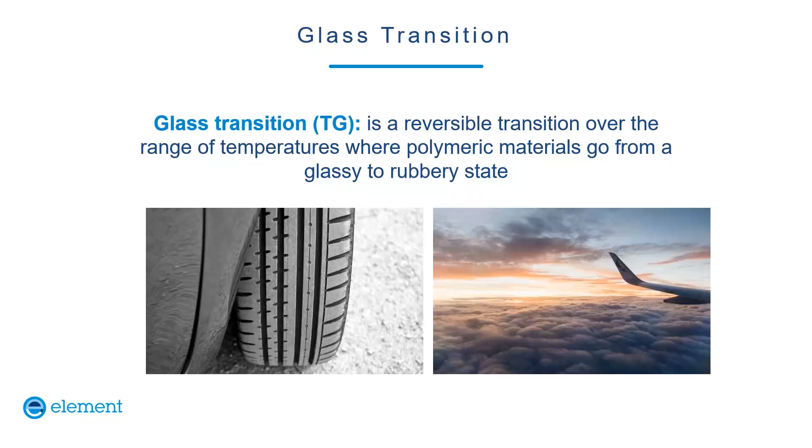The Challenger disaster is one of the most famous examples of materials used outside the appropriate temperature range. Segments of the solid rocket motors were stacked together, and the joints were sealed with a rubber seal. When launched on a cold morning, the seal failed. It was later determined that the material was below its TG and the rubber seals had stiffened, contributing to the accident. So the joints were redesigned with a different seal configuration, in fact, multiple seals, and a different material was selected before launches continued.

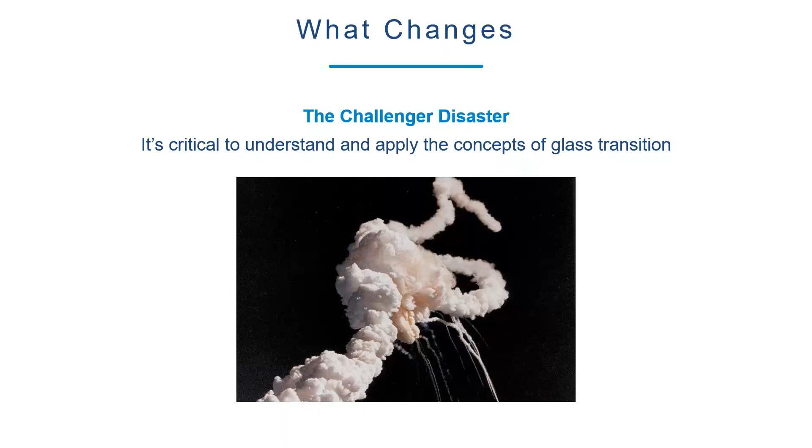So at the TG, the polymer chains become more mobile. Because the polymers have a range of chain lengths and cross-linking, this occurs over a temperature range. As this happens, the material becomes less stiff and more resilient. The polymer chains can slide over each other more easily. And so a few other things happen as well.

The coefficient of thermal expansion is higher above the TG. Thermal conductivity is generally lower above the TG, but there are enthalpy changes that are evident right at TG. Dielectric loss tangent or dissipation factor generally increases above the TG. So we can measure each of these phenomena using the techniques I'll discuss in the presentation. And the results from the different measurements are not always exactly the same, but they generally occur over the same range.

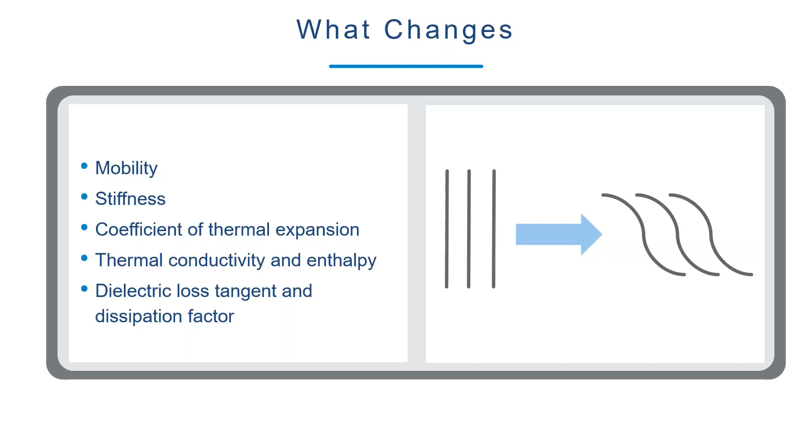We'll discuss how we might measure TG. The most direct way and the classical way is to run mechanical tests over a range of interest and look for loss of properties. To have any resolution, you have to run very many specimens over very many temperatures, and it just makes this approach impractical.

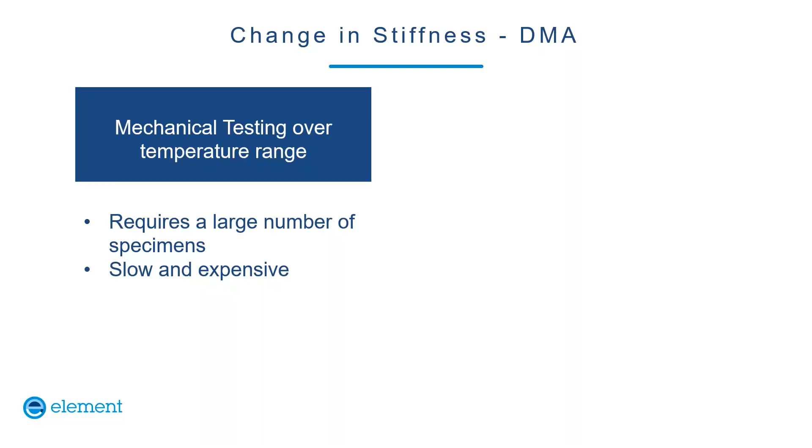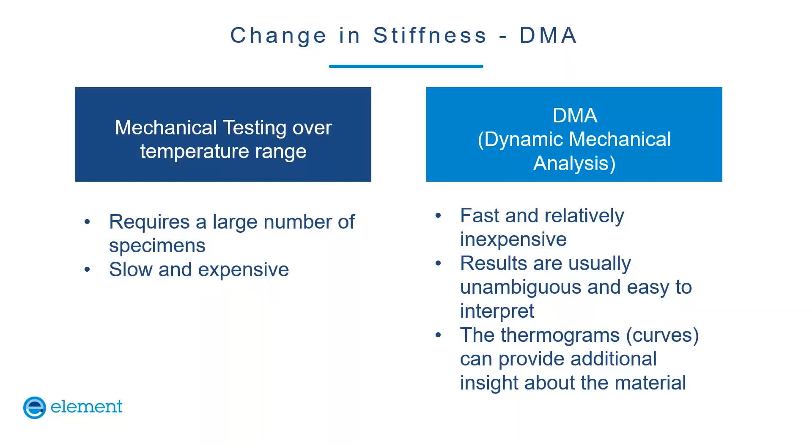DMA, dynamic mechanical analysis, uses force and deflection data to measure changes in stiffness under varying temperatures. Results are fast, accurate, and easy to determine. Of the various thermal techniques, DMA gives the most easily discernible glass transitions.

This is a photo of a dual cantilever beam clamp and a test specimen. The test specimen is this black rectangle here. The center clamp moves up and down. It oscillates in a sinusoidal way.

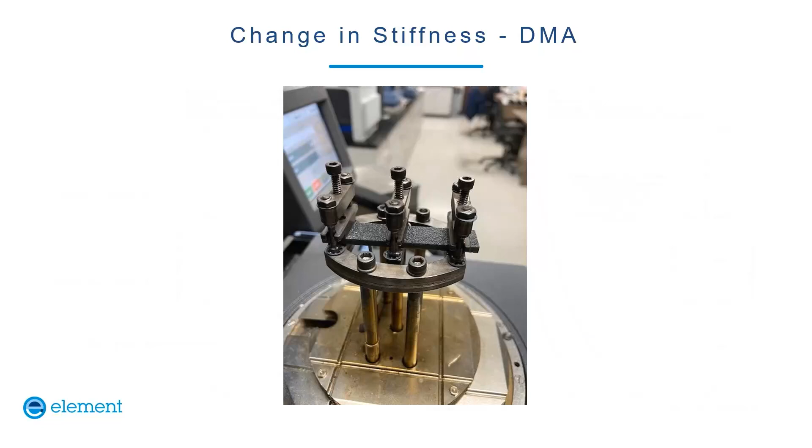It oscillates in a sinusoidal way, and we measure temperature as well, and we measure force and deflection as the clamp oscillates. A furnace fits around the outside of this and then slowly heats up over a pre-programmed range. We measure the change in the forces and deflections with temperature, and we get a curve like this.

The results are reported as three different curves. The storage modulus or elastic modulus is E prime, and it's this first green curve. You can see that it's fairly steady, and then it really dips down. And that's an indication of where the loss of mechanical properties occurs.

And then by drawing tangent lines on these curves, we can determine an inflection point, or what we'll call the glass transition from E prime onset of 44 degrees C. You would just go down here to the 44. This is usually the lowest temperature you see, and it's most conservative. And as I said, it coincides with the degradation of mechanical properties.

Now the E double prime or loss modulus is this blue line, and you can see it goes up to a sharp peak. It's very easy to determine where the peak is and get a glass transition temperature there. It's a little bit higher, 50 degrees C. Similarly, tan delta, that's the difference in the tangent angle of the force and deflection curves, is also easily discernible, and it's 60 degrees C.

So this sample happened to be a room temperature cure epoxy that was post-cured, and we can see all these temperatures are just above room temperature. Moisture will tend to lower TG, and we'll get back to that later, but it's a good time to mention that consistent drying or conditioning is needed to create reproducible measurements. But when you dry or condition the samples, it's important to stay well below the cure temperature of the material. Otherwise, you're going to be imparting additional post-curing to the specimen that the actual part might not see.

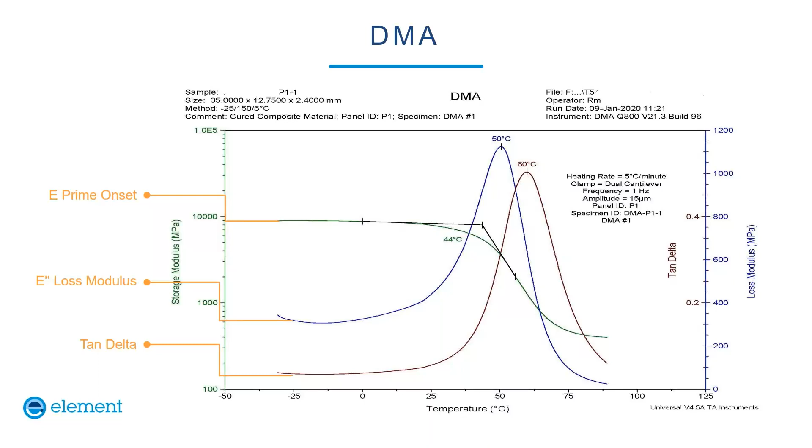I also want to talk a little bit about thermal lag. Thermal lag is important to consider in any thermal analysis, but especially DMA, because DMA specimens are usually the largest. The instrument measures the temperature of the air adjacent to the sample or just touching the outside surface of the sample. As the instrument heats, it takes longer for the center of the sample to reach temperature. Because of this lag, it's important that the calibration be performed at the same heating rate as the sample. Ideally, it would be performed with a material that's the same size, mass, and thermal diffusivity as the test material, but generally this isn't possible.

Polycarbonate standards have attributes similar to polymer samples and are readily available from instrument manufacturers, but none are officially traceable to a national standards body like NIST. These materials can also change over time or with exposure to moisture. Sandwiches of tin or indium between ceramic plates can be made from NIST standard materials, but lab-to-lab variation can result if these standards aren't consistent. So work is currently being performed in ASTM committees and other places to provide robust, reproducible, and traceable standards.

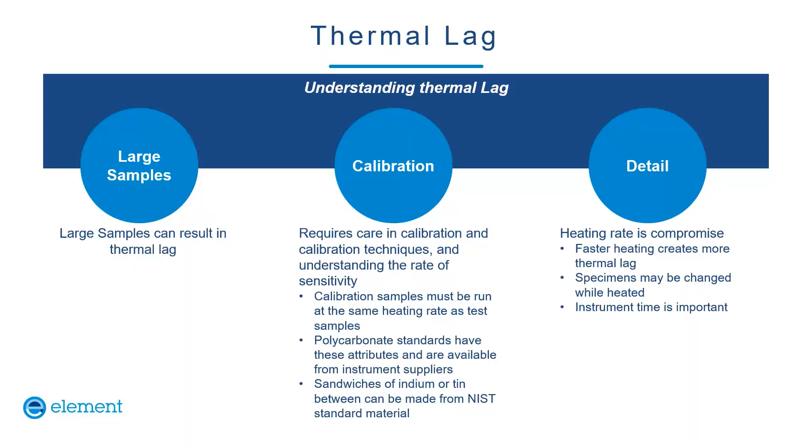And then the movement of the rod is measured with a LVDT, or linear variable differential transformer. Usually we heat up at 10 degrees C per minute, and the data is reported as a curve where the change of length is plotted versus temperature.

And the slope of the resulting curve is the coefficient of thermal expansion, or CLTE. It's actually coefficient of linear thermal expansion because we're just measuring in one direction. Because standards like indium have sharp melting points, calibration is easier to standardize, and there's less lab-to-lab variation.

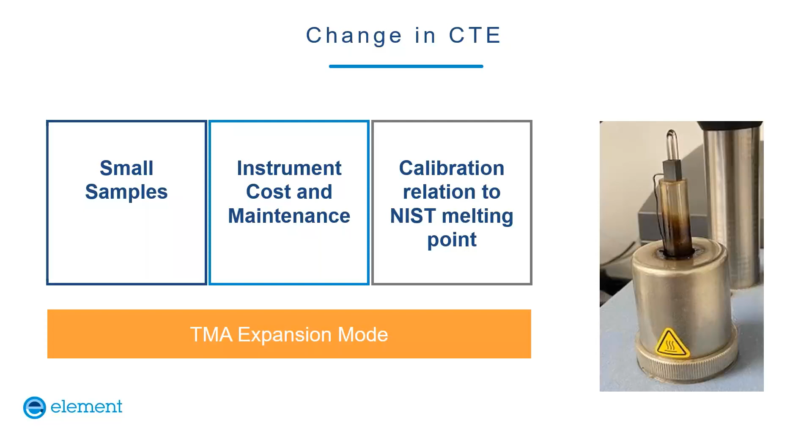Here's an example of a TMA curve. You can see that it's very linear here, and then it goes through a change, or an inflection point. And this happens at the glass transition temperature. This is a higher temperature material, so it's happening at 183 degrees C.

It's also worth noting that sometimes glass transition temperatures are well below room temperature. And so if you start your test at 30 degrees C, and the glass transition temperature is down here at 0 or something, you'll miss it. So often we have to start experiments well below room temperature for materials like rubbers and elastomers.

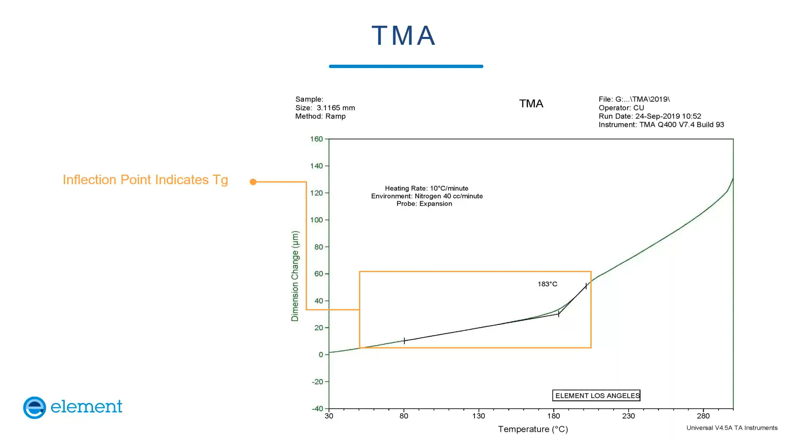TMA can also be used in a flexure or penetration mode. In each of these approaches, a larger force is applied and the probe deflects significantly. Usually we can do that with either a pointy probe, or we can do it using a 3-point bending fixture on a stage with a 10mm span. Specimen thicknesses and loads need to be specified.

These methods are written into some specifications, but it's important to get the loads and the thicknesses right, because the ratio of load versus span is important, and if you're not consistent, you get wonky data.

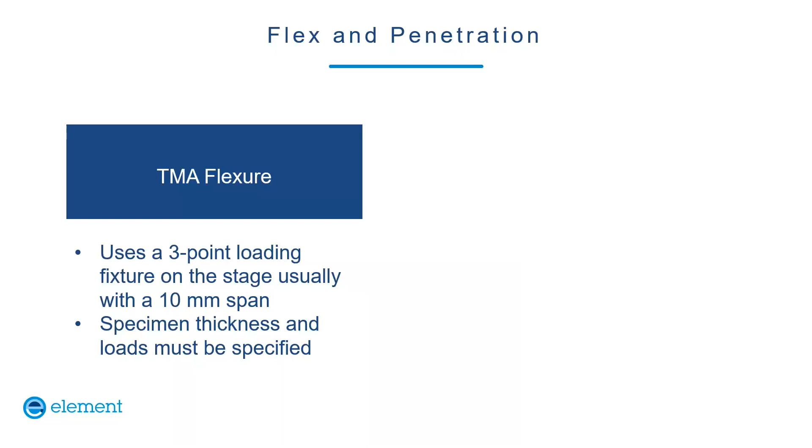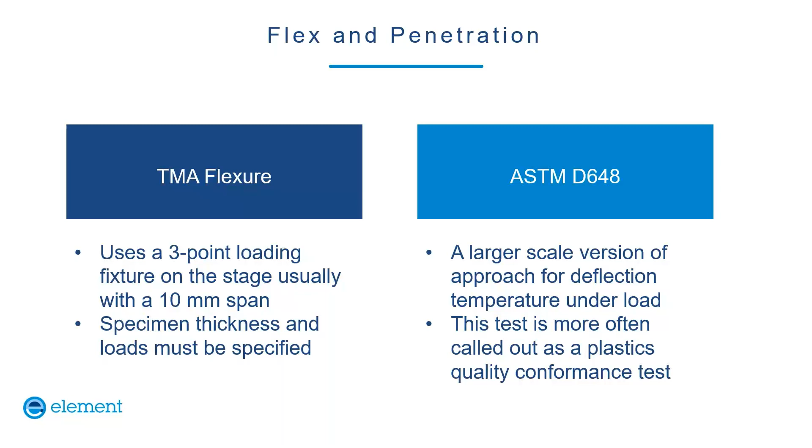A larger scale version of this general approach is ASTM D648, deflection temperature under load. It's commonly called out as a plastics quality conformance test, and you'll see it more often in the plastics community, but it's a much larger specimen that is loaded in bending, and you look for the deflection. And deflection temperature under load is not exactly the same as Tg, but they're certainly related.

We can also measure change in enthalpy, and we do that with a DSC, a differential scanning calorimeter. A small sample is heated, and the amount of energy required to heat the sample is measured and compared to an inert reference material. Because the glass transition creates a change in properties of the material, the polymer chains reorient, which requires a change in energy to heat. And this is shown as an inflection point on the curve.

Some of the advantages are, again, the instrument is less expensive than a DMA. Calibration can be more straightforward. This is an example of a DSC curve, and the area of interest is down here. We're heating it up, and then the amount of energy it takes to heat it up changes abruptly.

And where it first changes is called the onset of the glass transition by DSC. And this is usually reported because it's most closely related to the loss of mechanical properties. But sometimes midpoint is called out, and sometimes even endpoint is called out. So the onset right here is, again, 140 degrees C.

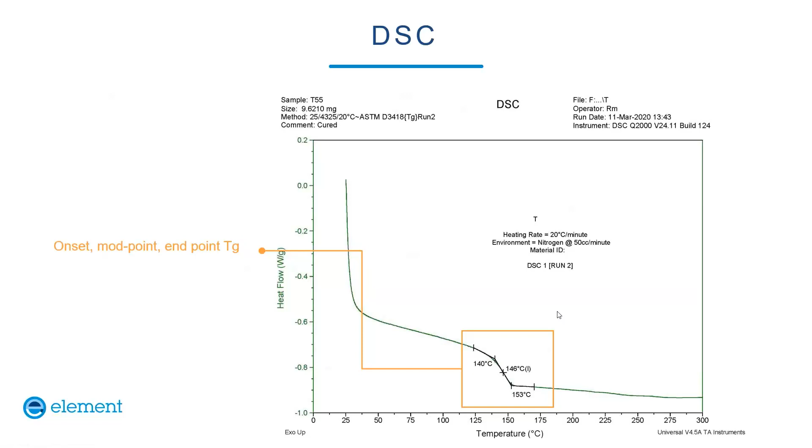Modulated DSC provides more resolution, and you can see the reversible changes in enthalpy. The instrument heats and cools in oscillation while gradually heating the specimen. So it'll be heating, and it'll go up and down 1 degree C per minute, and then that'll ramp up. And then the instrument measures the reversible and irreversible changes, and it's calculated and plotted.

So the top curve, in this case, is an irreversible change. And what's happening here is there's some kind of reaction going on. It's an exothermic reaction, so it could be a cure, or it could even be a degradation reaction. And we can plot the peak points and the onset of that. And then the bottom curve is the reversible change of heat.

And if you remember from the very beginning of the talk, we defined glass transition temperature as a reversible transition. In other words, you can go back and forth above and below the transition, and it will happen over and over again. Whereas a cure happens once and then it's done, it doesn't happen again. So in this case, we can clearly break out the onset, the midpoint, and the endpoint, and report them that way.

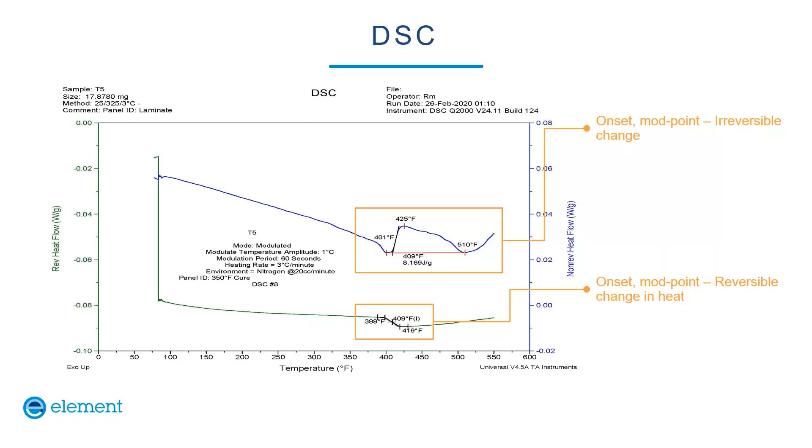For structural composites, the effects of moisture are very important to consider. Moisture will plasticize the material and make it easier for polymer chains to slide over each other, and it thus lowers the TG. So for testing, and I'm talking about mechanical testing of composites, we generally expose samples to high temperature and humidity until equilibrium, and they're weighed several times a week until they no longer gain weight. So this whole process can take several months, so it's usually a qualification test. And we can run DMA or other thermal analysis on wet specimens as well and determine the wet TG.

Specific criteria for the weight gain are given in ASTM D5229. CMH-17, the Composite Materials Handbook, provides guidance for FAA certification, and it's generally a base reference material. It recommends the maximum use temperature be 50 degrees below the wet TG.

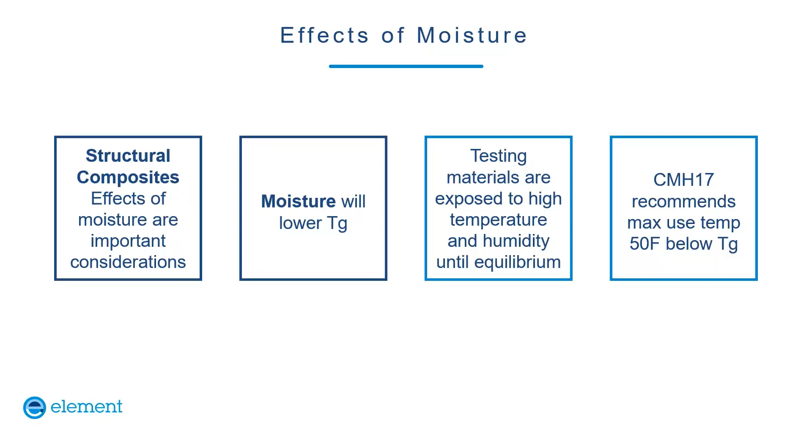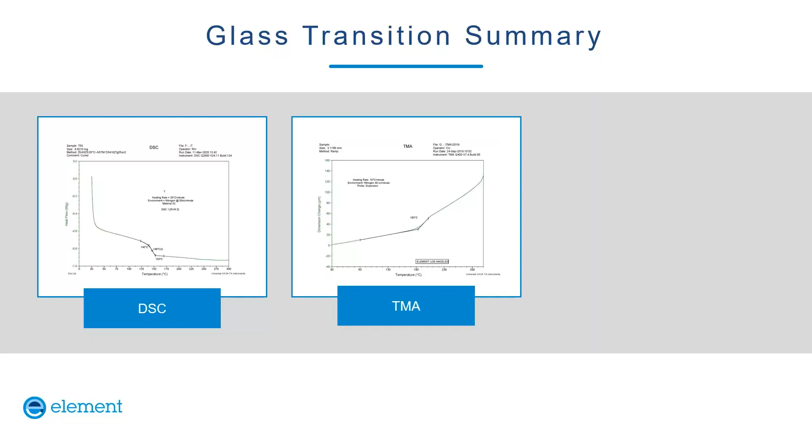So the three most common ways to measure TG are DSC, TMA in the expansion mode, and DMA. And we've looked at all these curves, and now you can see how the TG is apparent. Dielectric spectroscopy is another way you could measure TG, but the methods haven't really been standardized well enough to be in general use in industry. It's more a thing of academic interest and also for cure monitoring.

Each of these measurements, though, measures different things and will give slightly different answers because the TG is a range of temperatures where the polymer properties are changing. So it's important in both design and problem solving to understand that you're dealing with a range.